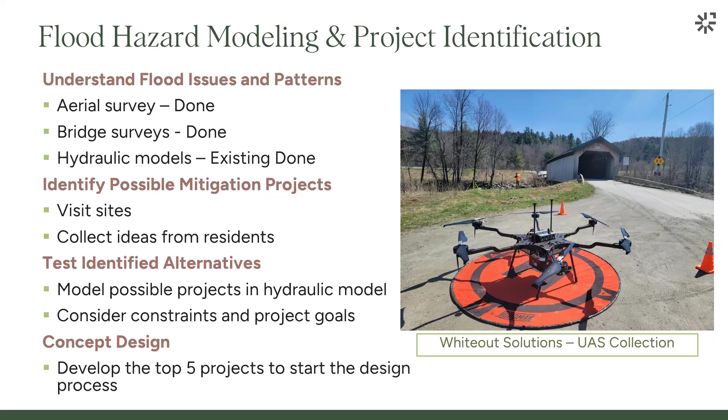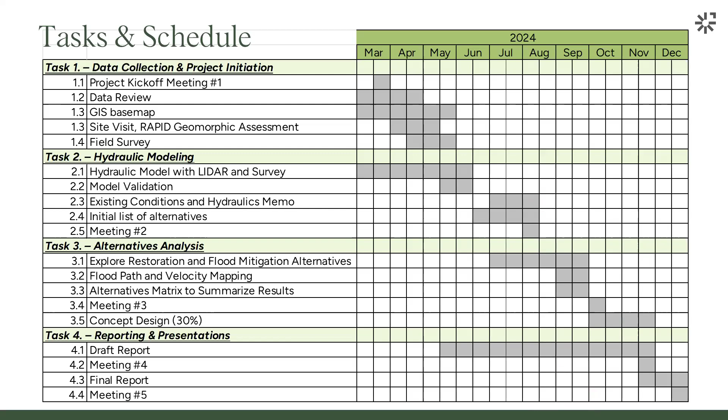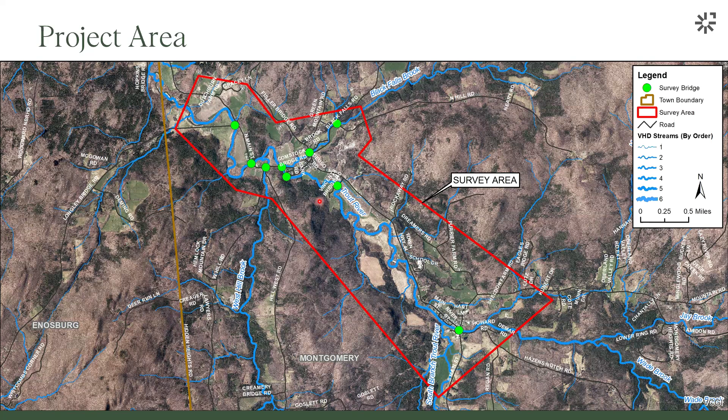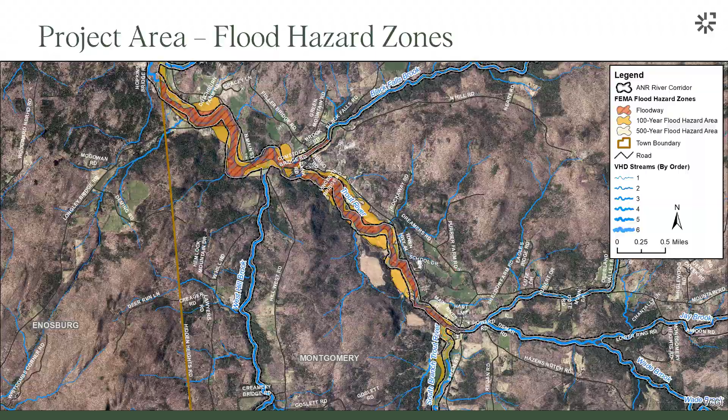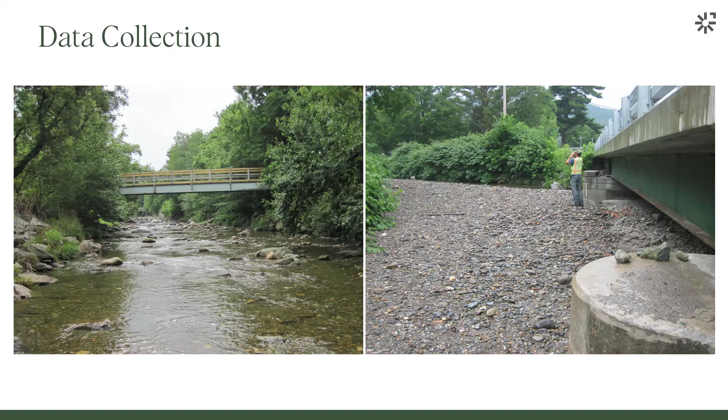What's also awesome about this project is we were able to leverage some UAS drone technologies. We partnered up with Whiteout Solutions, out of the Northeast Kingdom, and used drones to collect what's called topobathymetric LiDAR - a really awesome technology because it penetrates the water surface, so we're able to get a surface of the ground and the riverbed through the river corridor, throughout the extent of our project area.

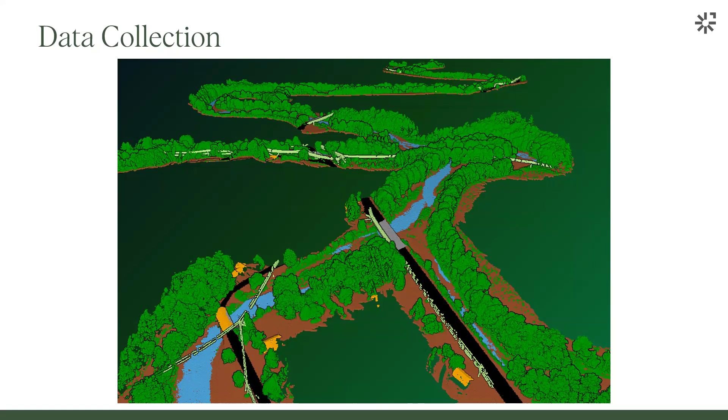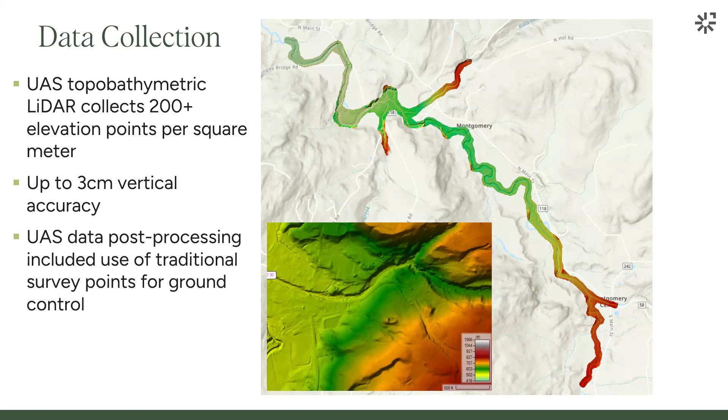We have a number of different locations where flow comes into the model, including the Trout River, South Branch of the Trout River, Hannah Clark Brook, Black Falls Brook, West Hill Brook, and a smaller tributary along Longley Bridge Road. The model encompasses about 7 square miles and is pretty big. There are over 250,000 cells within the model, which are basically computation locations where it's looking at water depth and water velocity on a small scale that then informs the larger model as a whole.

Another input that's really important for the modeling is hydrology, essentially the flows that we're putting into the model. It's really important to have the ground surface that goes into the model really accurate, but it's also important to have the amount of water you're putting in be accurate too.

We did a whole hydrology analysis where we looked at some nearby USGS gauges. There's also a gauge downstream on the Trout River that was only in operation for 2 years that we looked at as well. The numbers that ended up going into the model were from the FEMA flood insurance study, supplemented with regional regression equations. Those numbers go in at the input locations I showed before, the model extent where we're putting flow in.

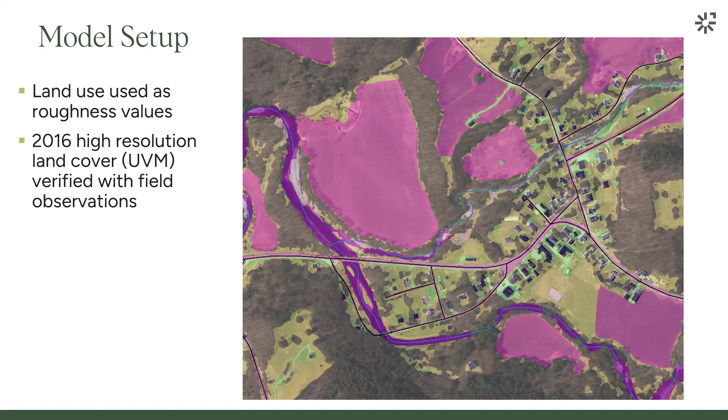Other things that go into our hydraulic model include land cover. This is high resolution land cover mapping that was done by UVM in 2016 as a base, and that inputs what we call roughness values into the model that help calculate how water moves through it. This snippet shows different land cover types that went into the model.

As I mentioned before, the base terrain is a combination of a couple different things. We have statewide LiDAR data, which is a technology where from airplanes you can sense the ground surface. We have that data from 2017, supplemented with our drone captured data from Whiteout Solutions in 2024. That was able to detect changes within the river corridor and also give us topobathymetric data, which can see beneath the water surface, since traditional LiDAR sensors can't penetrate water. So we have really detailed mapping of the stream bed, which is quite impressive.

If you zoom in on the model, it's amazing—you can see tons of little boulders and whatnot are captured by that.

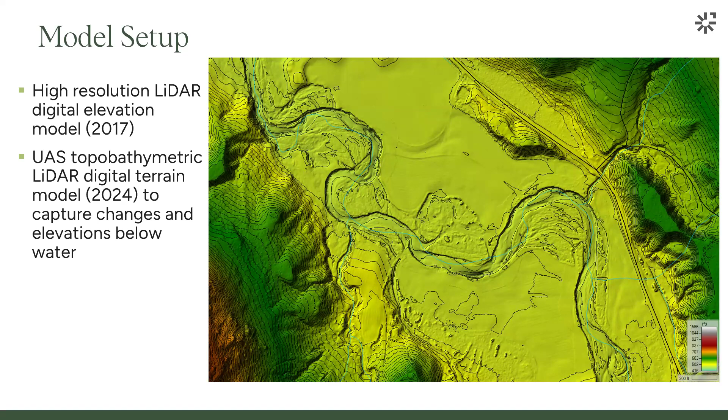Another really important component of the model is making sure we're capturing our bridges and culverts accurately, and that's where the ground survey was also really important. We have our ground surface and our water in the model, but we also have these structures, and looking at flood patterns around the structures is also really important. This example here is West Hill Brook, the North Main Street Bridge shown right in the center of the screenshot. We have this large model mesh that we refined to capture our structures, our roads, and other features like berms, making sure it's aligned well to the river channel.

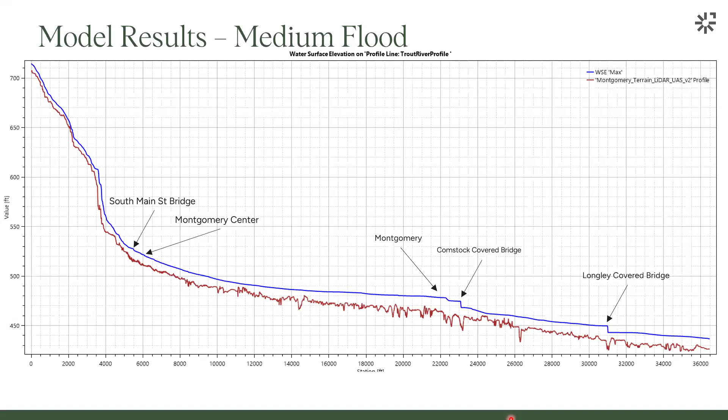Question? I was wondering, do you predict that in this medium or large flood, these bridges are providing sort of a choke point? Do you think the water levels would be enough to damage or start to wash away the bridge instead of just going out on the sides?

I think there's definitely that potential. When we look at both the water depth, and through the modeling effort we're also able to see predicted water velocities, looking at the combination of both of those things, you can start to think about the structural integrity of structures and stone embankments and whatnot. So it's definitely something the model can inform.

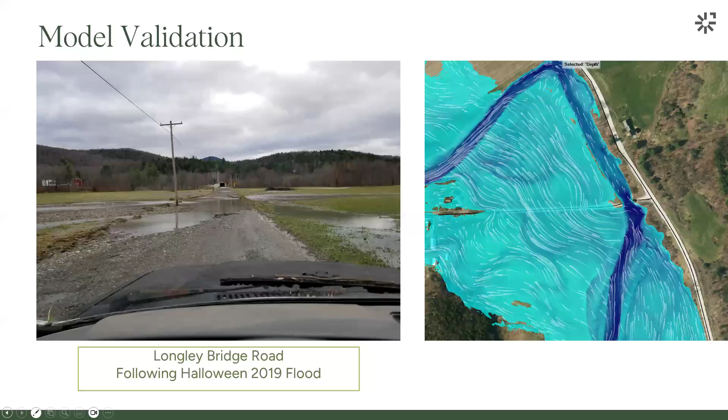Yeah, you're referring to the bridge that's on West Hill Brook. Right. But I guess my main concern is, as the river swells - it only gets up to my grass generally - well, the leach field's not that far away. So when the water recedes, how clean is it?

Because it might be contaminated by the leach fields, you mean? Isn't that how it works - the soil gets saturated and then it takes whatever was in the soil with it? Isn't that why farms have to be so many feet away? I guess my thought is, if the river was a little deeper, would the water stay in?

So we're going to be looking at a number of different alternatives in this location. One option is sediment management, because the bridge is really filled up - we were out there pretty recently, and as you mentioned, there's only a few feet between that sediment and the bridge. So whether it's reconfiguring that structure into something more suitable for this location, or developing some sort of management plan to figure out how best to pass the water through the bridge, because it's in a location where it's going to keep filling up with sediment.

Just after that, I'd probably say 25 trees - like Mother Nature's version of a beaver dam. So water goes up and pulls more stuff into the river. Yeah, it's a really challenging setting to be building a bridge right at the base of your watershed there, after you have that steep stream.

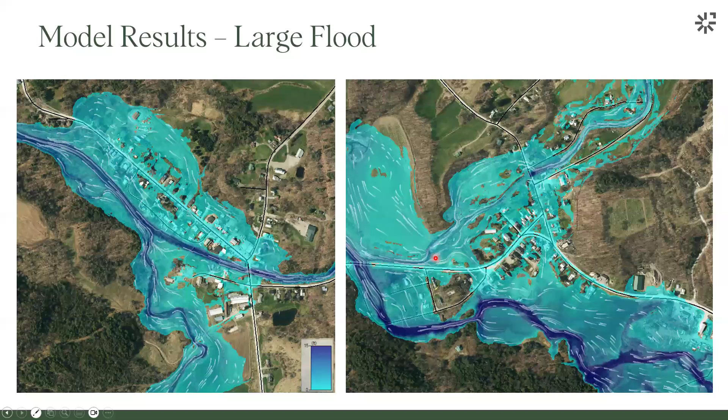That came up and redirected over a peninsula, cut like a 12 or 15-foot wide path. Yeah, it's about this deep. So the whole area that used to be river is mosquito ponds and such now. And if you walk these rivers, I think there are issues with regards to green and other colored algae, and the water temperature.

I don't know as we should be calling it the Trout River anymore. Maybe you should just call it river.

But I think there are ecological issues that need to be addressed as well. Changing the depth of it by dredging, as Chris is referring to, would help not only keep it in its banks, but make it a healthier river for wildlife. Because when water is like this, it's like a spa. We all know what those look like after a while without chlorine.

So I guess that was more of a comment than a question. Let's get to that after we go through the alternatives we've thought of so far, because I'm sure you might have some others, like making it deeper, that we can think about adding to the list.

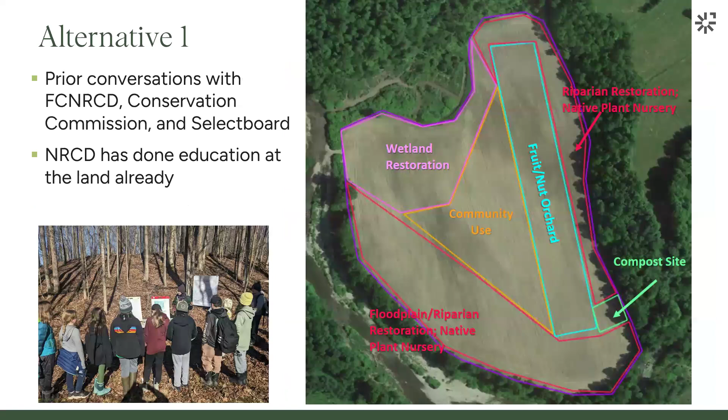Okay, second alternative. This is the bridge where West Hill Brook flows north under Route 118. The town has gotten permits a couple times to clean out under the bridge, but within a year or two it spills right back in. So that hasn't been working too well. Which is what we were realizing. I mean, you go out there right now, and this photo shows all the gravel from last month.

What's your recommendation for that area? We are going to look at a couple different things. You did talk about bridge replacement. I know it's structurally a good bridge, but we can look at that. Overflow culverts, there are different management plans. One is maybe you're doing the right thing by just taking it back down when it builds up. I don't know that that's the answer, but I think we're going to take a closer look here.

There are some ways of increasing sediment transport in areas by putting some weirs in. We're going to look at that, maybe just trying to have the water move a little quicker through this spot to move some of it during floods. So we have some thoughts, we don't know what the answer is. If you have more information about how often you're cleaning it out, or things you've tried already, it'll help us narrow in. I know Stacy, you've done some work here, so specific thoughts would be helpful, because standing there looking at it, it's not super clear what the answer is. We cleaned out just under the bridge, but we haven't gone down farther, so that's what happens, it starts building up again.

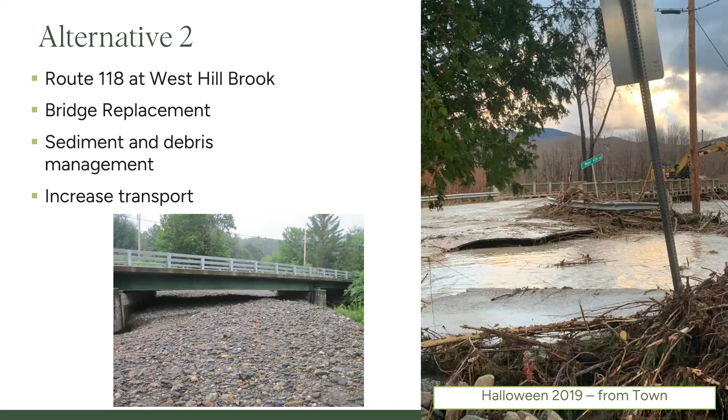Alternative 3 is maybe a little bit of a wild idea, but in this same location, maybe there's a way to turn the road so it moves over and meets up with Main Street further over, creating a wider location for more debris to get to the bridge and flow and sit off to the side, giving a wider area here. So as that debris comes down, it can spread out before it reaches the bridge and goes over the road. I don't know, before we model this, if it's going to work or not, but it feels like a valid alternative.

We had heard that there had been some homes here that were buyouts. So this land, you're using it as a community garden right now, but it seemed worth looking at. Could be a rock garden. It could be a rock. Yeah, so this was one other idea for this spot here. But the ball field was flooded, right? It floods in the park and the streets, baseball. Yeah, okay.

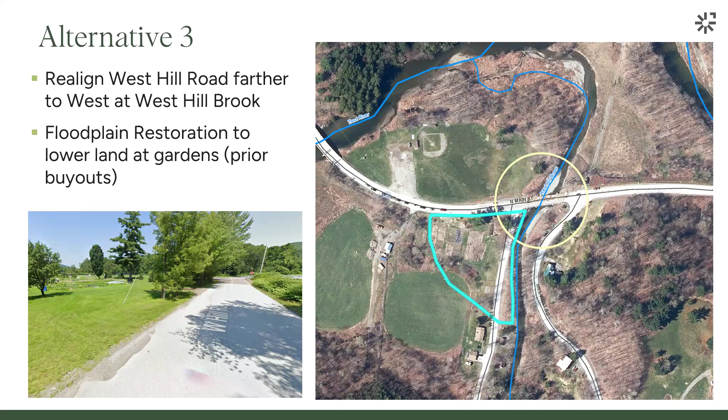Moving on. So Alex described a couple locations where the existing condition models show that particular bridges are backing up water upstream. Most of these bridges have had some damage in the past with erosion, or water going around and causing erosion, and debris hitting the bridge itself and hurting it.

So one of those is Comstock. Here's a picture of its location on the main stem, which comes around and makes this turn before going under Main Street. So in these locations, we understand these are historic bridges, and they're beautiful and a big part of your history.

Although I have bridge replacement listed, that's something we'd look at just to see what it might look like if maybe that bridge was moved to a different location or off to the side. We're also going to look at overflow culverts, locations where maybe the road approach could be lowered to let water more safely go over and around.

So at this location, and some of the other especially historic bridges, we don't know what the answers are at each of these, but we're going to take a closer look at the ways we can get water more safely, with less damage, either under or around. There's also a big choke point in the right margin, like a canyon that travels through.

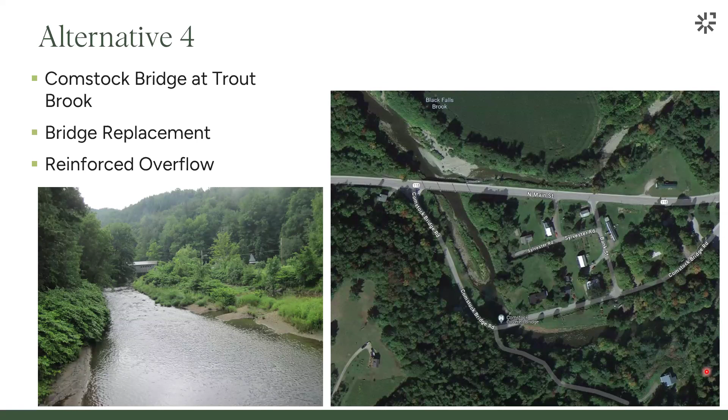It sounds like I agree, so a ziggy-zaggy river is probably better than a straight one along your road. So different bridge, maybe a different situation, but kind of similar in that the bridge itself is narrow and water kind of goes around it.

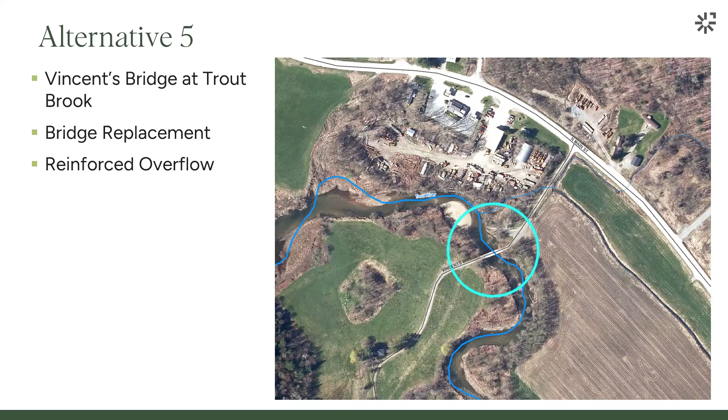So looking at different alternatives at Vincent's Bridge, this is on the main stem, as well as Longley Bridge. We had looked at a photo of this before.

Maybe, and these are things for feedback. If this is an acceptable situation to the town to just have some gravel put back on, maybe we don't need to do a project here. Or maybe there is a solution to concentrate the water or reinforce the road surface or something like that, so there's not as much expected damage.

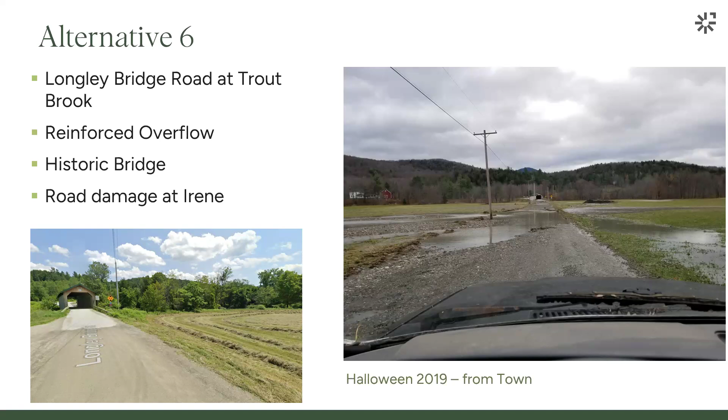Fuller covered bridge. This is one that Alex talked about and specifically showed on the profile, where you can see the river coming down and the water coming down, and then the water getting kind of stuck behind the bridge, just upstream.

This is a tight spot, with roads with homes on both sides and the post office and homes downstream.

So this is definitely a spot where if someone has an idea as to where you think the water could go, or if maybe one of these properties is for sale or someone's thinking about putting a property up for sale, we could maybe come up with a spot where water could more safely get past this bridge. Maybe someone else has an inside scoop on how to get more water around. We're going to come up with some ideas, but if somebody has a thought, this is a particularly tight location.

You think it was filled in at some point, or made more narrow to put the bridge there? I think so. That's what we think. Isn't there land for sale up above that right now?

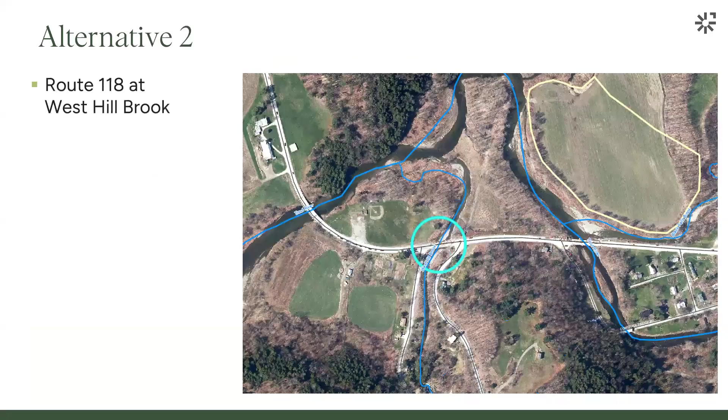That's not a bad idea by any means, but I wanted to bring us back to this spot, where the water comes down, so the river's relatively smooth here. If the river had a really big bump here, that would be why the river might be collecting things. What this is showing me is that the bridge itself, right here, during a flood is slowing water down so much that in the moment, in the flood, it all gets so slow that anything in the channel coming down just stops and drops.

So I think even if you do spend a lot of time digging this down, you're probably going to have a lot of deposition during a flood, in such a backwater condition. Maybe that in combination with some other things. It's not a bad thing - if you do have a lot of deposition there, maybe it's a location for some clean out, but I don't know that you could rely on that as the only thing here.

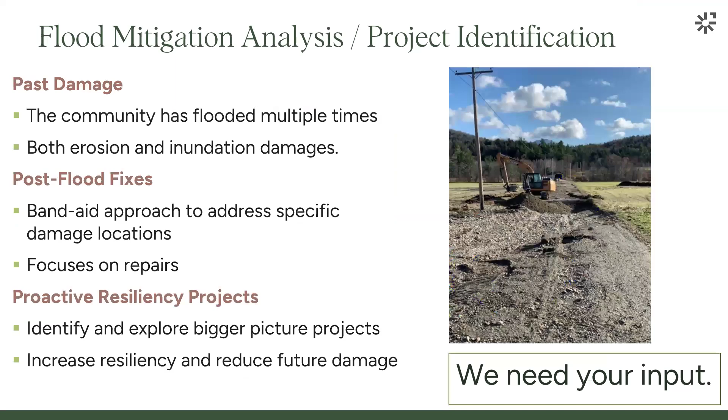On the flood of '97, some of the first responders said at the Fuller Bridge, the water went through the bridge and over the top - over the floor, not the roof. It had actually gone through the bridge.

Which means that is causing blockage too. So even raising it a couple of feet, again combined with other things, might help. So I think there's potentially some options: raise it, add overflow culverts if we can find space, widen it to the degree we can.

We're going to be taking a closer look, but just knowing how tight the river is upstream, if anyone has an idea of a property for sale or something that could widen it out, that could also be a really big help. Stacy?

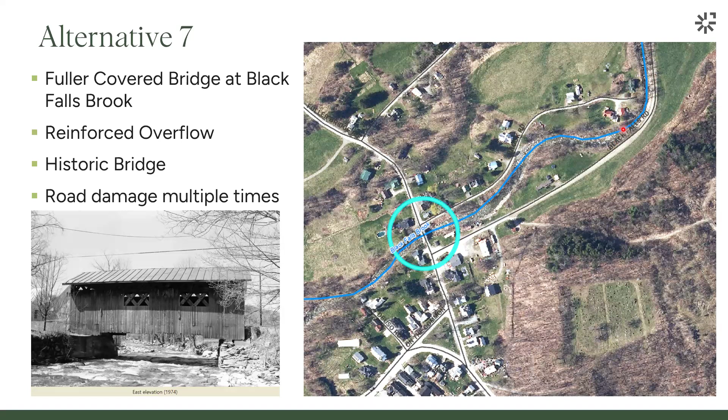Jessica, this isn't right at the bridge, and obviously this would mean really working with landowners upstream. But where Black Falls Road kind of spins a little corner - similar to your discussion on the other road - if there were opportunity for the road to be shifted away from the river, is there? Predicting the future, Stacy. No, keep going, I think this is what you were maybe starting to get at.

So where the river comes down here, it's really squished between people living on this north side of the river, and the road is right here. This is a spot where it was washed out and there's some riprap put in. It's probably going to continue to be an erosion spot based on the velocities. So I think what Stacy was getting at is, does this road need to be in this exact spot, or could it move over further? We just put this blue blob on here, but maybe the road could come in up here and travel closer to the tree line, with more space for the river - dig down that land and let the river flood out into here. We don't know who owns this land or what the plans are for it, but it seems like a spot to look at least.

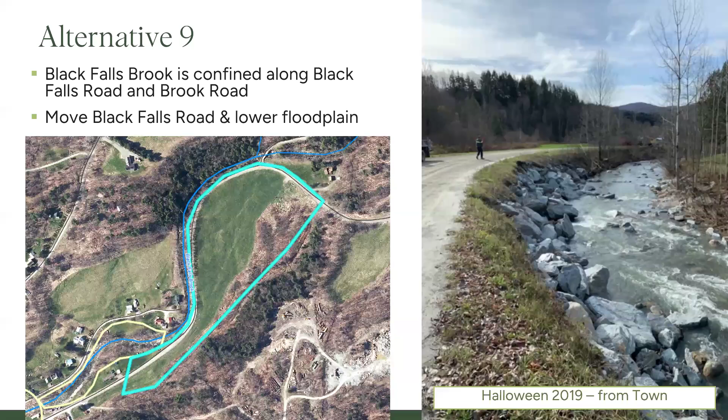And then similarly, is there an opportunity just right upstream of the bridge? I didn't circle any homes here, but I circled some of the open land and lawns. Maybe there's a way to make the river a little wider here. I don't know how much deeper we could go, but a little deeper and a little wider could help. And if there was another opportunity, like if someone was moving, maybe this polygon could get even bigger. But this seems like a tough spot where we really are seeing water coming out, damaging roads, getting into homes.

Okay, totally jumping around - did anyone have any other thoughts about those spots, Black Falls Brook or?

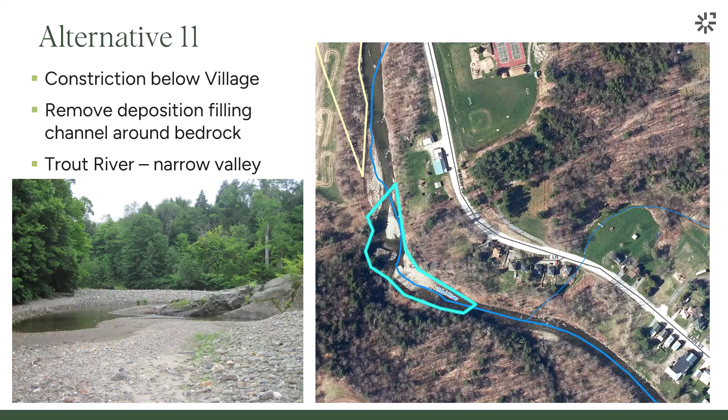Moving further upstream, in the center, there's homes and businesses that flood. You've seen that in the past. The model's confirming it. So we were trying to figure out if there's ways to give a little more space as the water's leaving the village, especially because we were seeing the most flooding even at smaller storms down in this area.

So if there was a way to open this up so there's more water adjacent to the river and less water up where you're using the land, we're going to test these. On the far side of the river here, it's really high. The land goes up quite a bit, so there's not a lot of opportunity here, and we know it already floods. So we're going to try this, but we do know it already floods and there's not a lot of space on the far side.

There's also a lot of erosion on the banks there where the two branches meet. All the houses along River Street have lost a significant amount of property just through erosion over the last 10 years. Right in here. And I know that this polygon here includes at least one home that's still there and some outbuildings and things.

So there's an acknowledgement that we're going to test this, and we don't even know if it'll work. But if it does work and it seems like it would be really worth it, then there would need to be discussion about whether it makes sense, what people are using that land for right now, and what that might look like if it's even determined to be a good idea, which it might not.

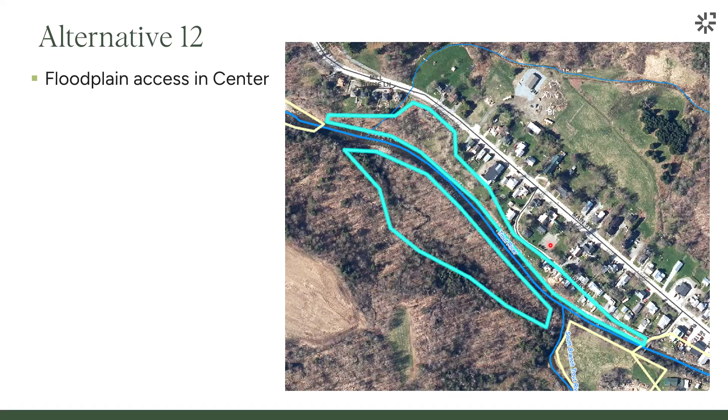Okay, so this is just slightly upstream, the south branch and the main stem. A lot of this area is used for farming. It also does flood already, so I don't know yet. We're going to take a closer look and see if there's an opportunity to store more water there, or if it's already storing as much as it could. So that's one option.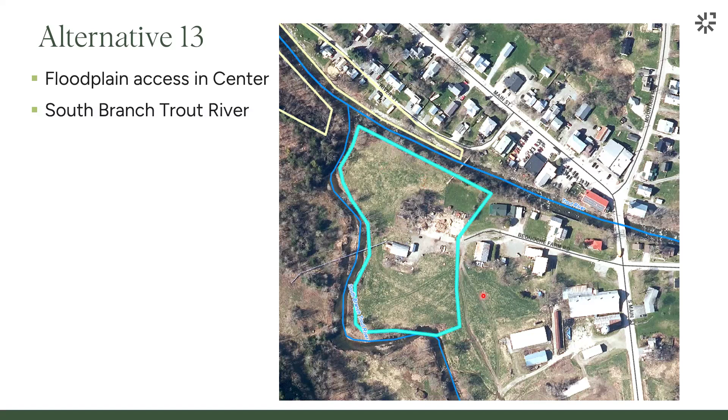I think part of it is there aren't a lot of options for where water can go other than into the home. So we're really trying to come up with ideas here. One is the snowmobile bridge. We're not sure - the modeling isn't showing that the snowmobile bridge makes a big difference, but it could if it was clogged with debris. So we're going to do a little more looking there.

It's right in the heart of the center, so we thought it was really worth taking a look at. Alex had shown some damage photos in the past, like when we were looking at the first part. Here's a few more. I think we addressed this a little bit.

So the snowshoe at Main Street had water. The bridge - this is the North Main Street Bridge - was washed out. And I thought this was really interesting: right downstream of the North Main Street Bridge, on the river left looking downstream, this was all eroded down. Like the river really used all of this area. And then if you walk through that spot today, there is this big wall here. So it seems as though following that '97 flood, some of this was filled back in and a wall was put in.

Did the collapsed bridge help cause the erosion? It could have, and it looks like it's tilted to send more water sideways. There's also erosion on the far side - in this upper photo you can see there was erosion there. And water went around the front of the snowshoe also. So I think water was really going on pretty much both sides of the river, down Main Street, in this size flood.

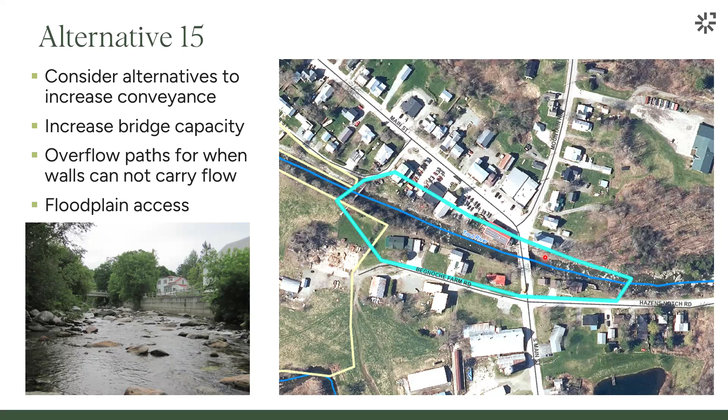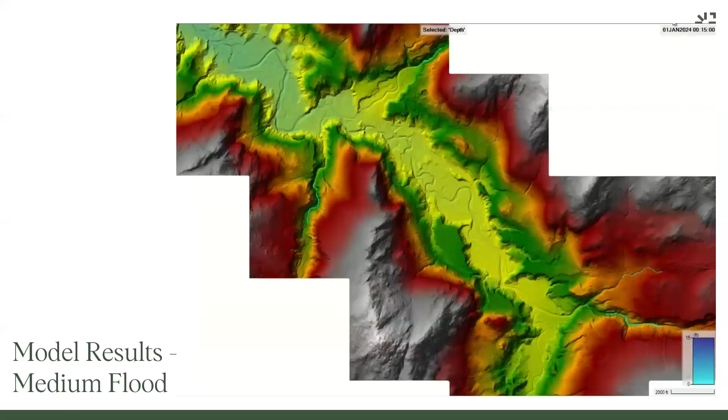Go ahead. So I guess the answer is yes and no. We have one assumption of general starting wetness, and then the shape of the hydrograph - like how much rain you get over the time of the storm - comes in for each of the tributaries. So what's used, and I'll flip back to where Alex talked about the hydrology - the hydrology is basically how much rain is coming in from where and how fast.

Each of the other tributaries has less water, and the timing's a little different. The model assumes some initial water already in the stream, and then the storm gets added on top of that. Smaller tributaries are assumed to have a smaller amount of water, and the water gets there faster. We saw that in the video for Black Falls Brook, where the flood came in first before the main stem started to flood out.

You might have a time when a tributary had extra snow melt quicker and is different, but this is kind of the general model. The tributaries generally have less water and generally get there a little sooner than the peak flow on the main stem. So we did make those assumptions, and we're modeling different size storms, but the timing and shape of the storm is staying the same.

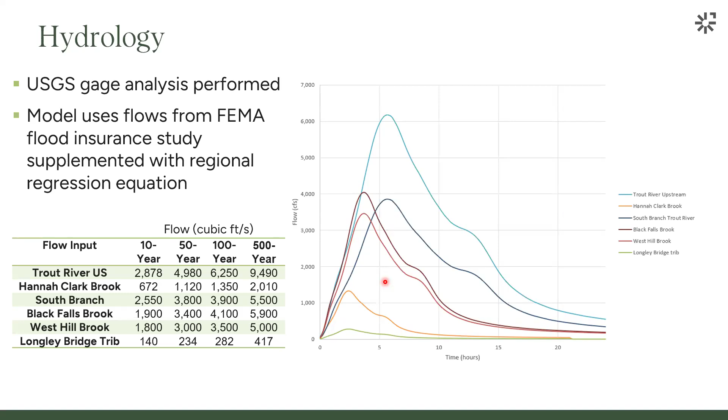Seems pretty consistent. Well, Irene was interesting because it came up the Hudson, the whole thing came up the Hudson. We didn't even think we were going to get it. And it came up and it clobbered us because I live right on there, and we stacked all these rocks and stuff against the door. But once again, that's the advantage of being right up here—it's a flash flood. So bang, we managed to keep the water out of the cellar for maybe only a foot deep for 45 minutes, and it all went down again. But that's because it stopped raining.

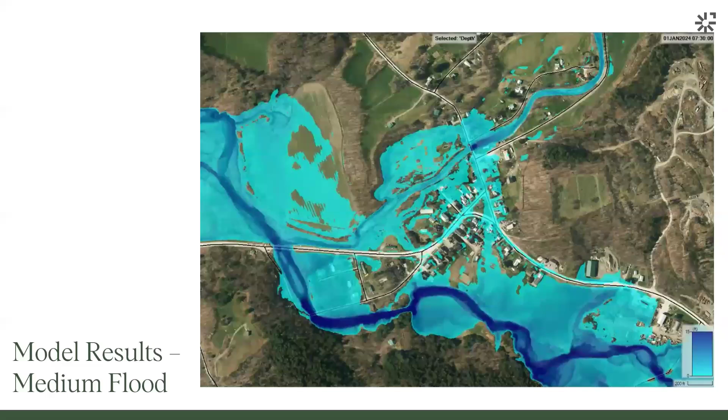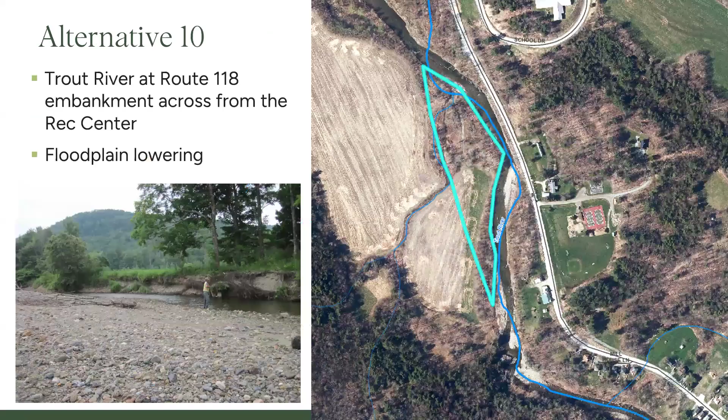Other questions? I think I had just one more alternative. It kind of gets at the stuff coming down. We were trying to figure out if there was any spots where we could try to catch some of the water and debris before it got into town. Our model doesn't extend super far up into the watershed, but one spot we were thinking is maybe some of these farm fields on the South Branch might help.

Because it seems like the flooding in the center starts to happen downstream of the confluence first. So if there was a way to catch some of that water before it got to the confluence, maybe that would be helpful.

Here's just a summary of the ideas we've talked about so far in one spot. We're happy to take input, but there's also some other ideas that we're not going to be modeling because it's just not part of this type of study, the type of study where you're looking at the river model around the villages.

I think there's opportunities for making sure there are buffers and woody vegetation. This catches logs coming down. When you have woody vegetation, it slows down water. Any upstream areas, try to reduce sediment from road runoff. I know you've had a lot of road washouts at different storms—all that's just sediment that comes down in the rivers and gets clogged in the bridges. So, working on things like that.

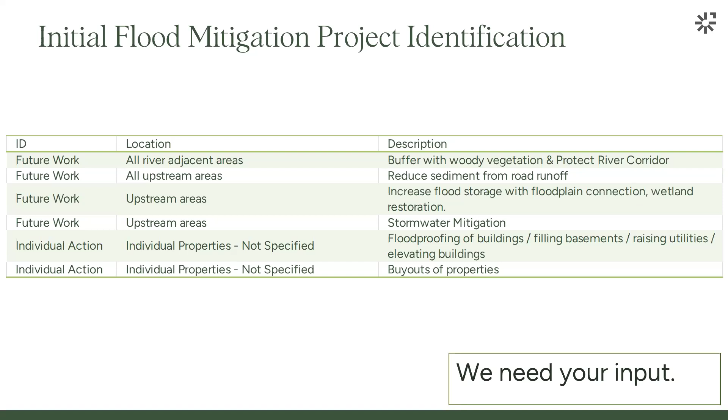I think that was really it for today. We can definitely talk more if people have more ideas. They really want us to look at this list of things with the model, so let us know. And if there's feedback on how we're predicting the flooding now, and whether it matches or doesn't match what you'd expect, also let us know.

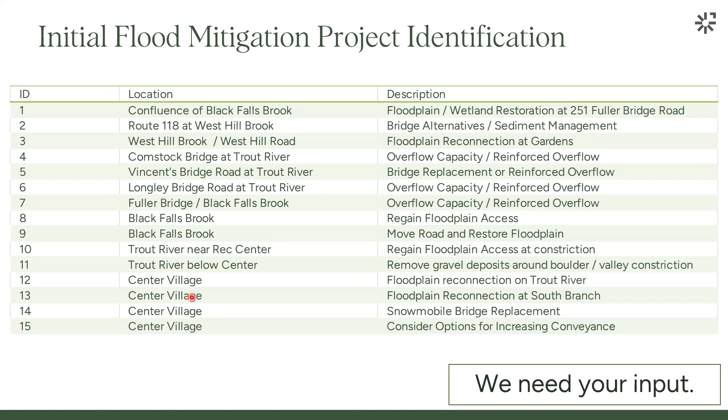We use the term village to refer to just the built area.